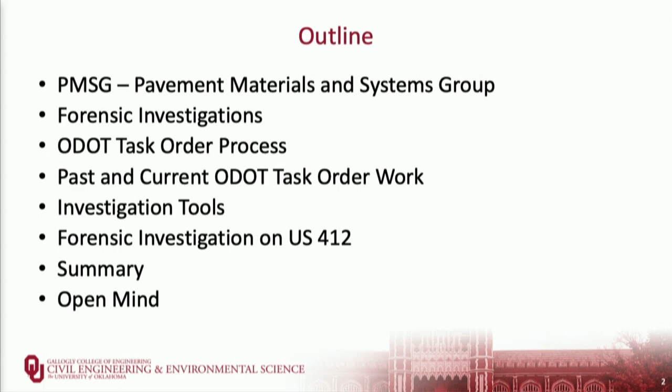When I was at ODOT, we developed a test standard. Normally at national levels we have AASHTO, ASTM, and a lot of those really start in development at maybe a state level. So Oklahoma Highway Department. When I developed this standard, I was looking for something. I wanted more structure. And the guide there is in the link. And there's basically 3 levels of investigation.

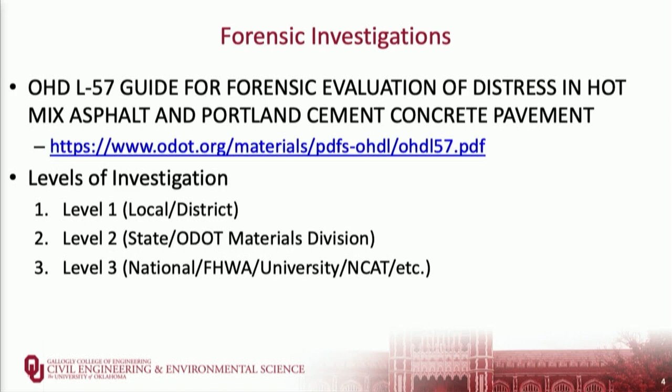You might have the local, or what we call the district levels. The state, the ODOT Materials Division would look at these. And I did a lot of those. And we even did, when I was at ODOT, a level 3 where we had FHWA come out and assist us, and we actually trenched an I-40 pavement out in District 5. And I don't recommend doing that, but you can learn a lot from a trench. And we do trenches out at the NCAT test track all the time because they close the road. But for safety reasons, you generally don't want to do that.

So the investigations we normally do at OU are a little bit more involved than what I did at ODOT because we have more access to different technologies than I did when I was there. Plus, another reason, I'll explain these a little bit, we just didn't have the personnel and the time to do that. We were more production oriented.

So on a level 3, we do a preliminary investigation, visual analysis, pavement core sampling. Well, nobody likes destructive cores, but nothing like a core to really tell you the health of the pavement. Pavement slabs, like I said, we don't like trenching, but that is a valuable tool if you really need to. Generally what I do when you trench, you pull a string line, you look at the deflection, and is it a subgrade problem or is it actually a problem in the asphalt construction layer? So that's good to know.

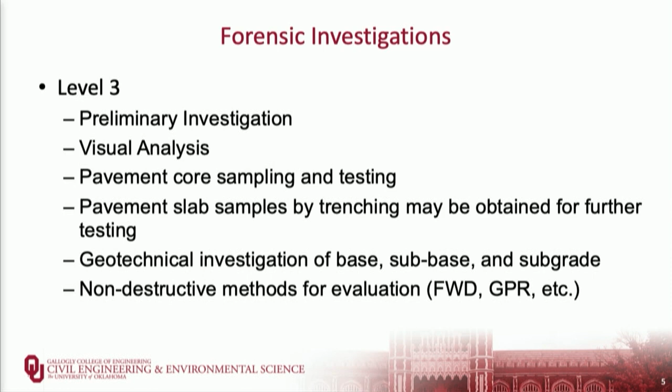Geotechnical investigation base. Well, remember I said open mind. I look at everything that I can, following the guidelines in what I'm going to show you in a little bit, but I want to start from the bottom up, right? We build a house with a foundation, so I want to look at the foundation first. And then we have these tools, non-destructive, that are nice. I don't like poking holes in the pavement more than anyone else: FWD, GPR, et cetera.

Okay, in that OHDL procedure, I referenced this NCHRP report 747. Isn't it nice how we dovetail these presentations today? And the things that we do for the NCHRP, this is one of the things that we implement. I used a lot of other guides when I did investigations. If you read this report, you'll have 90% of what I know. So that's a good science part of this.

Okay, so I found in that report some good things to explain the definition of investigation. So we investigate to understand the underlying causes of pavement failures. 81% of the respondents, the state DOTs that they surveyed, and please fill out the surveys if you get them.

I don't like surveys. When I get them at home, I just throw them away. But when I was at ODOT, I always filled them out because sometimes I ask surveys, and for me, they really mean something. So to get meaning, you have to have participants, and meaningful participants. So don't be the person that doesn't get listed in a survey.

That's kind of embarrassing. But collect your data to support development, calibration, performance standards. Well, when the SuperPave Mechanistic Empirical Design Guide, or Darwin ME, or whatever you want to call it now, came out, we had these projects where we did these calibrations, so 43%. Third one's to collect data to support investigation, long-term effects of traffic and environment. Of course, that report covers not only flexible pavement, but also rigid pavements. So that's a good guide for both pavement types.

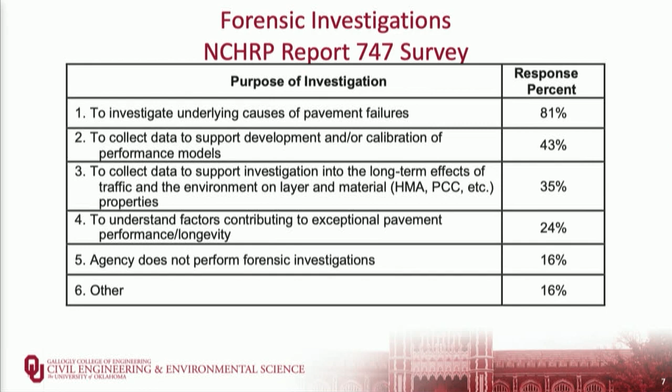Understand the factors leading to exceptional pavement performance. Well, there's the one I never get a call on, say, come tell us why this performed so well. It just, well, it did good, we think it did, but everybody that laid it is dead now. So the other one here is agency does not perform the forensic investigation. That's probably why we do more at OU than ever before, because ODOT doesn't have the personnel to do these investigations. And then other covers other reasons, whatever.

And there's some additional reasons: to support studies conducted as part of accelerated pavement tests, like NCAT, to assist development of repair techniques. We just did an investigation looking at that. They say, well, we did this forensic investigation, we recommend this brand new technology, but it hasn't been done in Oklahoma. So, like good researchers, we want to say, well, let's investigate this as part of another project, and we did that.

So another thing, you might want to evaluate a new product, and ODOT used to have a mechanism for that. Well, we've got this brand new product, you spray it on the pavement, and you never have to rehabilitate it. It's just magic. Well, we want to investigate that, right? So that's a good way to do a forensic investigation. So keep your mind open on all these reasons we do investigations, and in that one case I want to cite, is there one or more of those cases where it would have fit in there of what a forensic investigation is? And so the other one there is evaluate existing pavement and properties for rehabilitation.

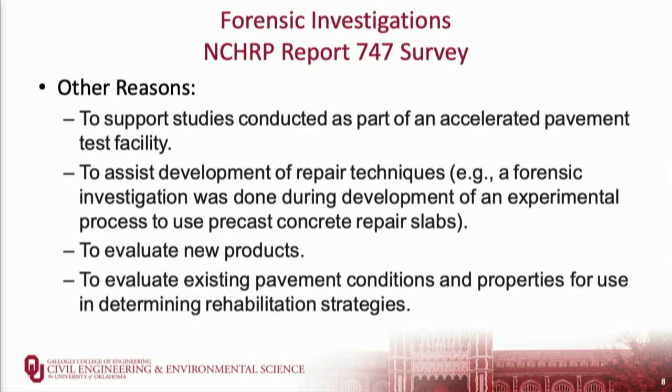That's kind of what I look at finally in an investigation. I say, well, we figured out some leading causes of what might be the problem. Let's go to the future and see if we can figure out how to make it longer and economical. I mean, really, in civil engineering, we want to use an economical solution. We could build a 24-inch pavement. It'll last a long time, but we don't want to really waste that much money, so it has to be reasonable.

Keep your mind open. So here's the ODOT task process. Main thing from this, the blue form: the district level at ODOT would form that, or they might call up OU or OSU or whoever they want to look at this, say, we got this issue here, we want you to do it as a service or as a forensic investigation, and here's the project, and they can start that process. Then ODOT would finish that blue form, and once it's approved and signed by ODOT, the yellow form would be completed by whoever helped with that blue form investigation, or is going to do that.

This map down here is just the ODOT district levels. Some of you may not know that. And then we get to the end, we get the final report. You can see all that.

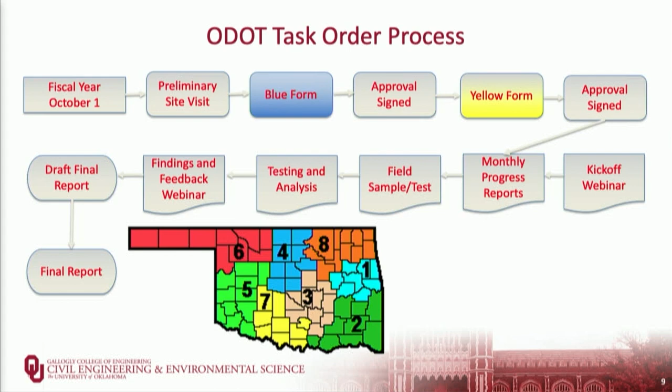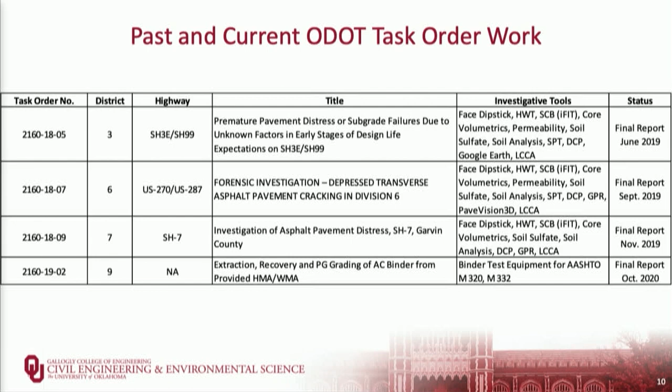Okay, here's some of the past projects. I'm not going to read through all these, but they have a task order number, usually a district that's doing it. If you see 9, that just means the central office, like maybe materials division, wanted to look at this. And so we have the title, which kind of explains it, and then the investigative tools that were used on it, and then the dates that we finished the report and where we're at on that.

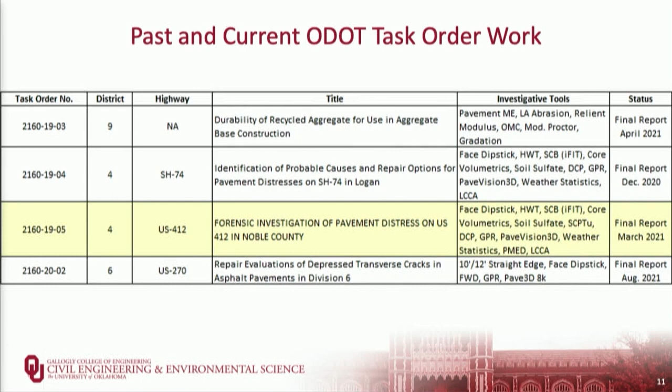So I'm going to talk about this one that's highlighted on US 412 up by Perry on I-35. It's about 6 miles west, and then you come back about 2 miles eastbound, and that's the area that we investigated. I'll highlight that, and that's what I'm going to talk about for most of the rest of this presentation. And there's some more.

Okay, so in that NCHRP report, these tables for flexible pavement you want to look at, and it's real easy. They have a matrix where you have causes in the columns, and then across the titles you have, well, what could cause the problem, right? Could be mix design, could be binder content, could be an issue with a paver. So if you look at this, you really get a good idea of where to start in your investigation.

And then this table 2.4 with some examples of data that you might want to look at. Table 4.1, non-destructive tests. You know, there's another one of those acronyms. And then 6.2 is the example laboratory tests. Remember, this is a guideline of laboratory tests that you want to look at.

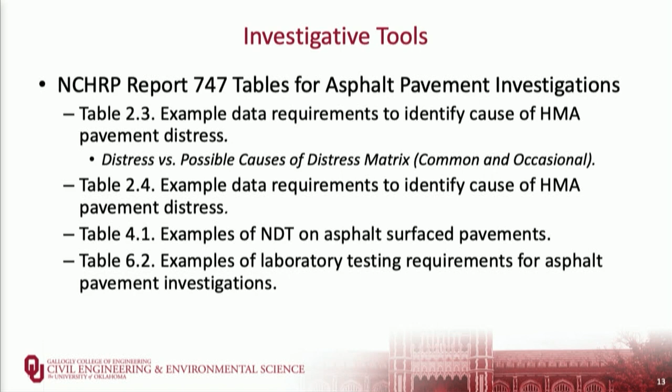Okay, so here's some of those tests that we do. We use a 10-foot or 12-foot straight edge looking at rut depths. We have this face dipstick that ODOT loaned us that we can look at rutting and IRI, rutting in longitudinal and transverse directions. Seismic cone, Dr. Jim Nevels ran this for us on this project, US 412. We have ground penetrating radar. I think that's a 1,000 megahertz antenna that they're using on our OU team.

PaveVision 3D, you probably saw that out in the parking lot. And we've also used that, the PaveVision 3D 8K that's out there in the parking lot as well. And the FWD, we use Dynatest. This one is from Texas Transportation Institute that we used on another project. We used JILS FWD in another project. So we have these investigative tools, non-destructive and destructive tests. You can read all about those.

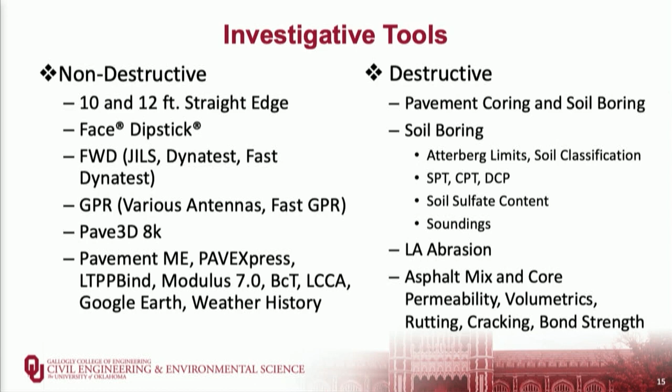And we like to start from the soil. If we're seeing dips and waves on the road when you're driving down it, that's a problem, right? We might want to investigate. Is that an asphalt problem or is it a subgrade problem? So we might want to do some soil borings, and we might want to do some roadway cores just to look at that. If we want to look at the soil under the pavement, we want to take the core out first, and the core is a very valuable tool.

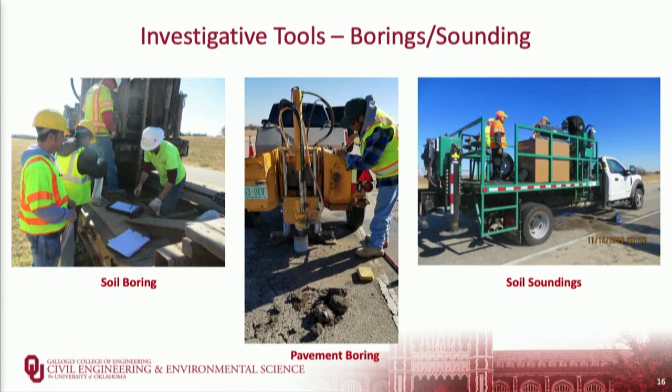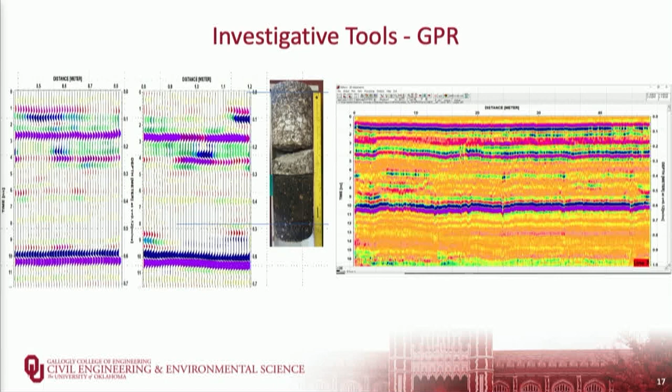Okay, so here's the ground penetrating radar, and we have this core here that we calibrated from. And you see this delaminated layer down in there, and you see how that correlates to the changes in color in the GPR. And then you see that color plot over there. So if you did a bunch of that, you would have a pretty good idea of how thick the pavement was and where that delamination occurs.

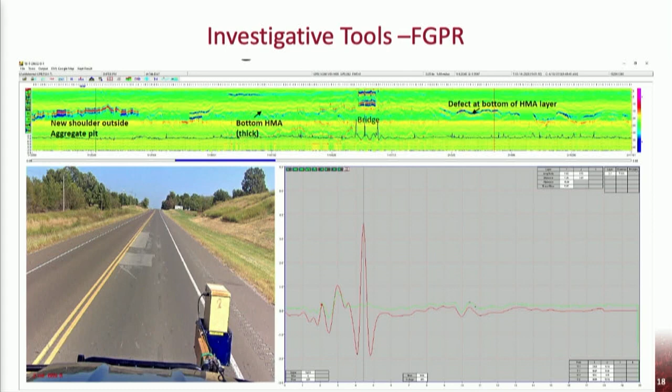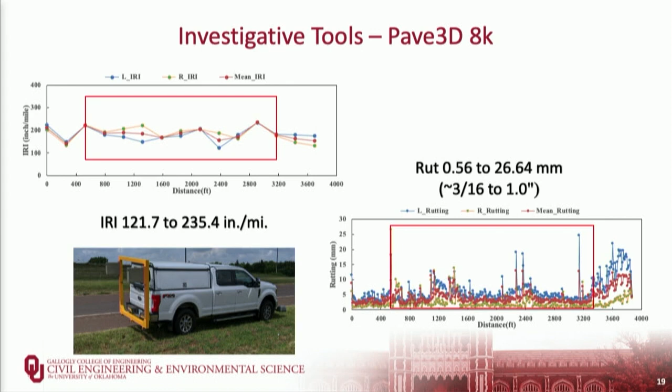If you see a delamination, that's going to cause a big problem. This is TTI's fast GPR, which they can go highway speeds on and give you a running look at your thickness and some of those deflections. So you want to use this on a bigger project looking at the bigger extents, and you don't need traffic control for that. This is a Pave 3D 8K I showed earlier, some data that we get from OSU that runs this for us. And you can look at rutting, IRI, and some other things.

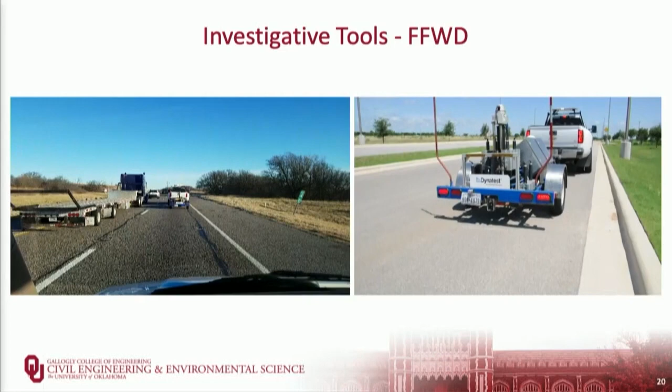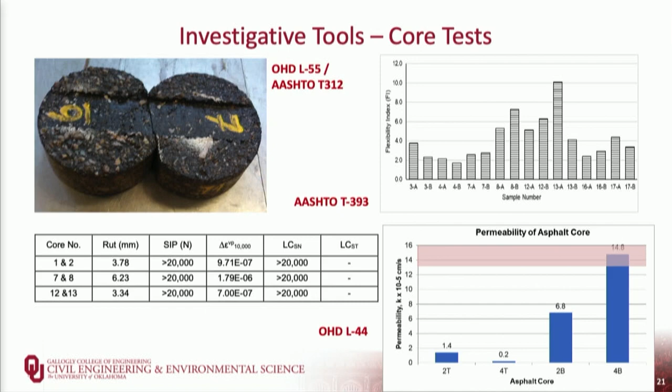Here we're using the Hamburg rut test, looking at a stripping inflection point and some other parameters that were developed by TTI. So we look at rutting. You see this is very good rut resistance, well below the 12.5. But look on the right here, and you see the flexibility index, the Illinois test method. And this should be greater than 8. So all of those are less than 8 except for one. And then we look at volumetric properties, permeability, see if it's very permeable, water getting in there. So just some of the tests.

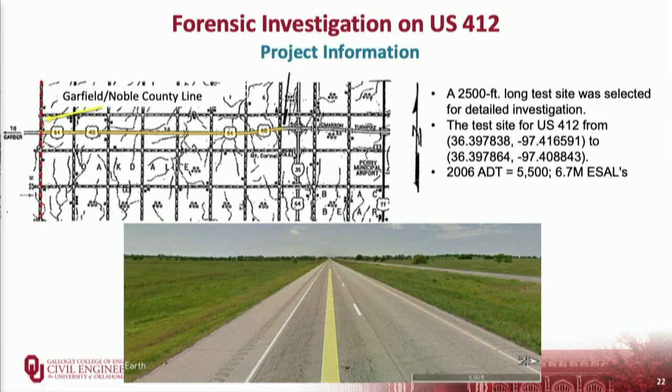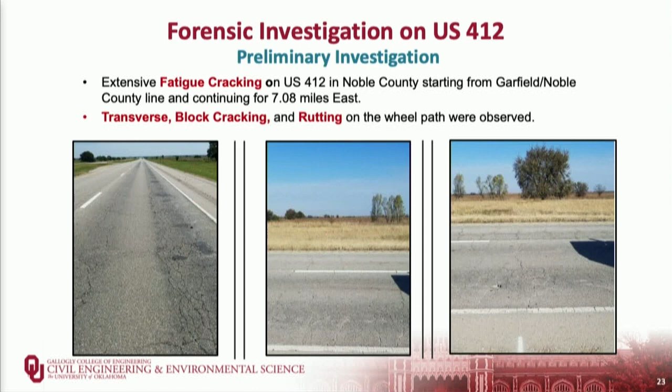And that's a US 412 project and the location. And the pavement there, you see the alligator cracking, and you see why the concern is there. And then that's looking eastbound there on the left side. You see the alligator cracking throughout. And there's some transverse cracking, and of course, because of the traffic load and the alligator cracking, you have additional rutting. And so we can look through the sections here, and we've looked at this in Pavement ME. That's the structure of the pavement.

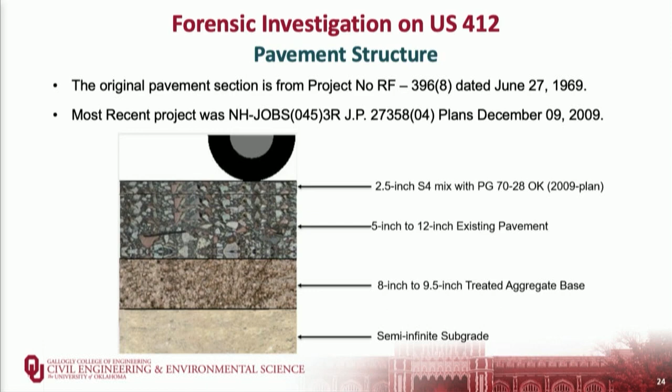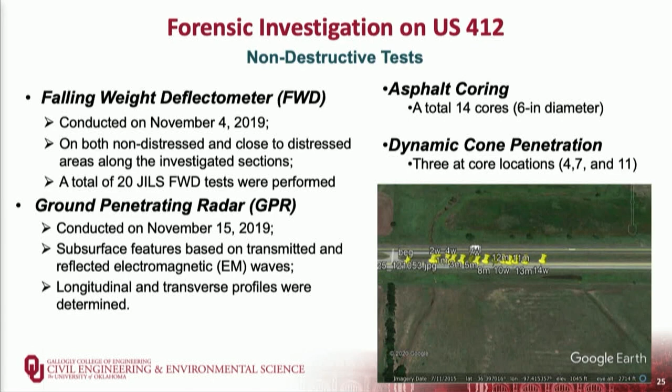FWD tests and Google Earth can be a valuable tool to set up your locations for sampling. We go out there and mark them with a GPS, and then we mark them here, which is a good thing to have. Do asphalt cores. We did 14 on this investigation. And there's some of the tests that we performed.

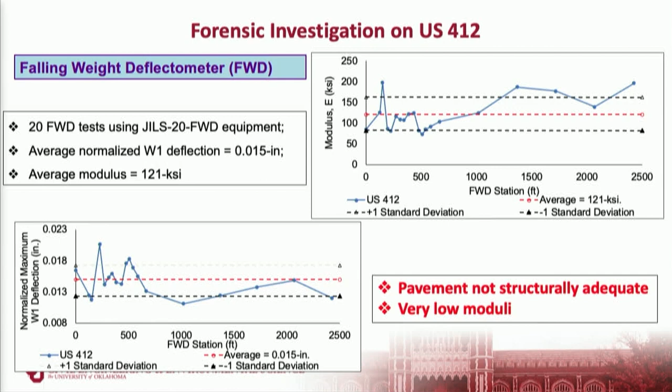Am I in trouble now plotting all these? Too complicated? I hope not. Hope it means something to you.

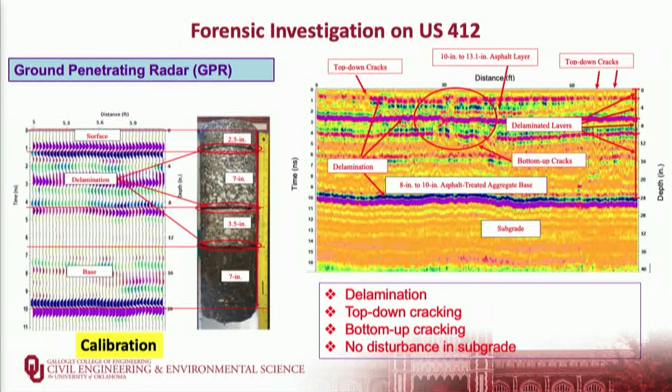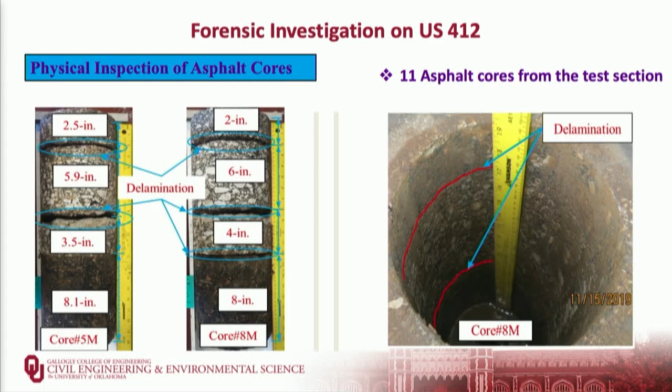And there's more of that. There's one core on the right we couldn't even get out of the road, it just came out like gravel. So, okay, we could look at other things. There's a thickness.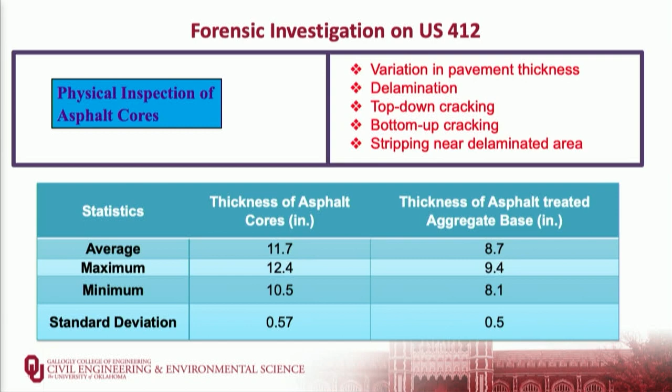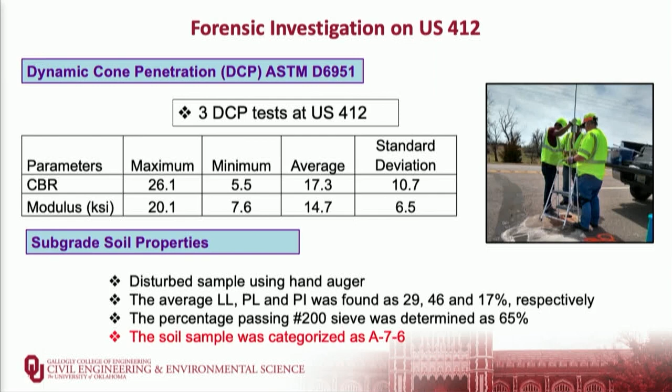Okay, we gotta do soil tests, right? We want to look, see if the soil could have caused some of this. So we looked at computed CBR and modulus values. So soil classifies A7-6, and then there's Dr. Neville's seismic cone penetration test vehicle, and there's some results from that. So we didn't find any problem with the subgrade, that's good subgrade support.

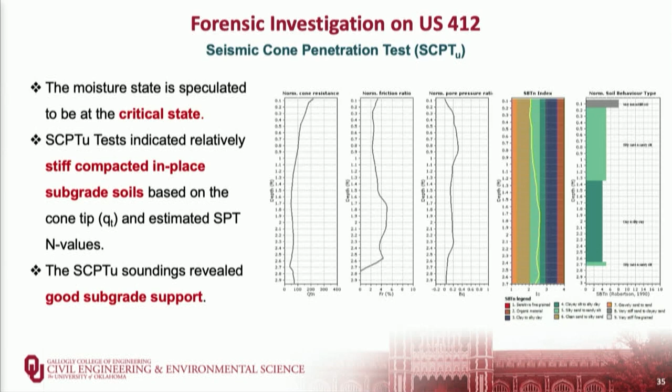Test for soil sulfates, less than 8,000 is good, so all good there. If we saw some dips and rolls in the pavement, we might want to be sure we check for sulfates, but that wasn't the case here.

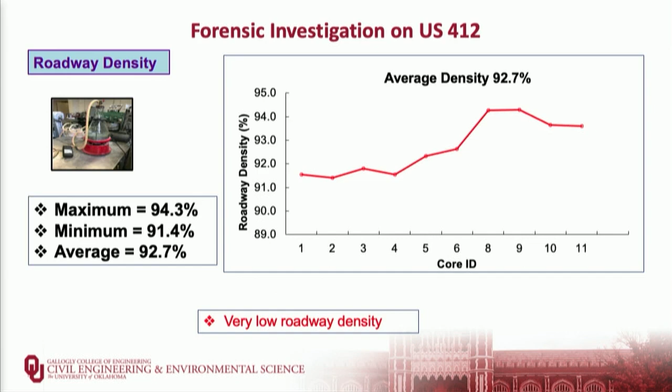Density is pretty low, so these alligator crackings, you'd have to go back to construction records and look at that. But for pavement this old, density should have been a lot higher. So with low density, it oxidizes more, chances of cracking. So that kind of verified that.

And so we used another cracking test called Illinois Flexibility Index Test, IFIT, and look at all those numbers. Remember earlier I showed you it should be 8 or above on that other project, and this one, not even a whole number. So that very much verifies that what we saw visually, we saw in the test as well.

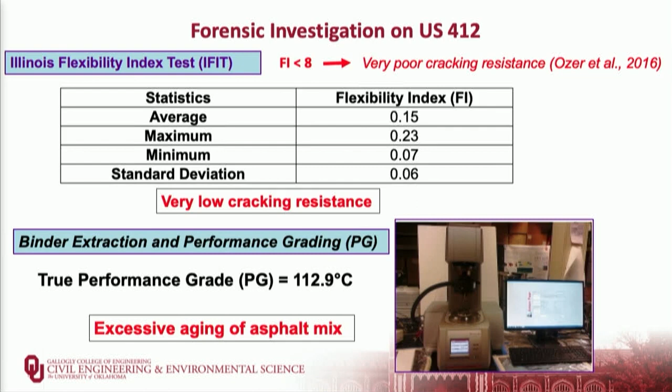And true performance grade, 112, that's extremely high. So highly oxidized, as shown through this DSR test that we looked at. So both of those very, very much verify the field observation.

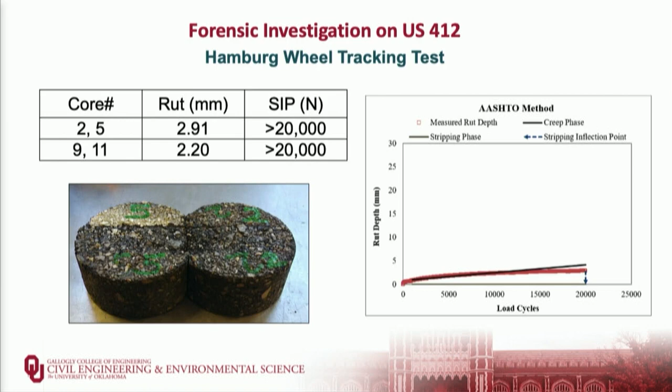There again, very good rut resistance, as you would expect. We're trying to balance things, and we want performance, and well, it is rut resistant, but we had ruts. Why? Well, when you get a lot of fatigue cracking and you have those delaminations, you have settlement, so that's why that happened. So you want to make conclusions at the end of your report, and we found that the

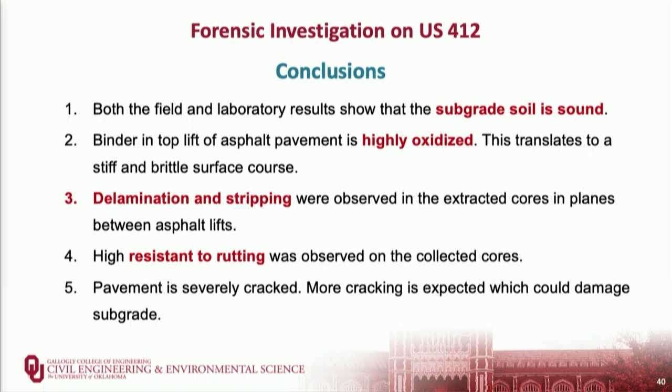subgrade soil was sound. The pavement was highly oxidized for several reasons that I showed. Delamination and stripping were significant. Resistance to rutting, due to that Hamburg rut test. So due to this highly cracked surface, we expect it could damage the subgrade if you did the do-nothing approach.

So we want to look at some life cycle cost analysis options so we can do a more economical temporary fix on it. We mill half an inch, fill with half an inch of S5, which is like a 3/8 inch nominal maximum size aggregate with a polymer grade binder suitable for that traffic level. And so we rated these as options ODOT might want to choose, ranking from least to most costly.

So in summary, in a forensic investigation we have destructive and non-destructive tests, and various other services we do in these task orders, which might be called a forensic investigation from the definitions I gave earlier from the NCHRP report, but it might be a little bit different. So we do those other things for ODOT.

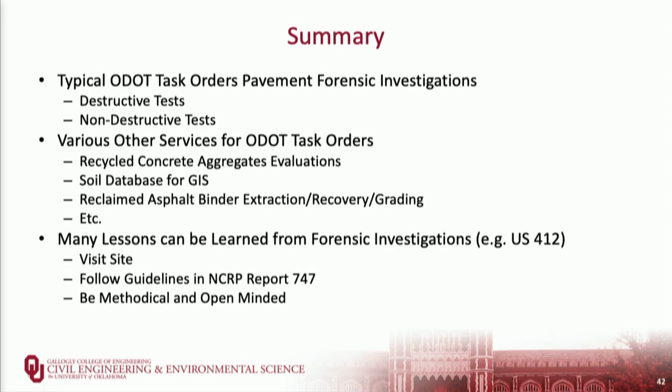So many lessons can be learned from these investigations. You really need to visit the site, not just rely on a camera. I don't know how many times I've driven up on a project and seen a problem that really wasn't evident in the pictures. Follow the guidelines, remember the art and science of problem solving, so follow that science, but also allow your mind to be open to accept other possibilities.

Be methodical. And with that, if you email me, and please do if you have any questions, be sure to use my middle name in there because there is another Kenneth Hobson at OU. I always get called Dr. Hobson, and I'm going, I'm not a doctor. So feel free to contact me.

Have you opened your mind? Any questions?

Okay, I either did really well or very bad.